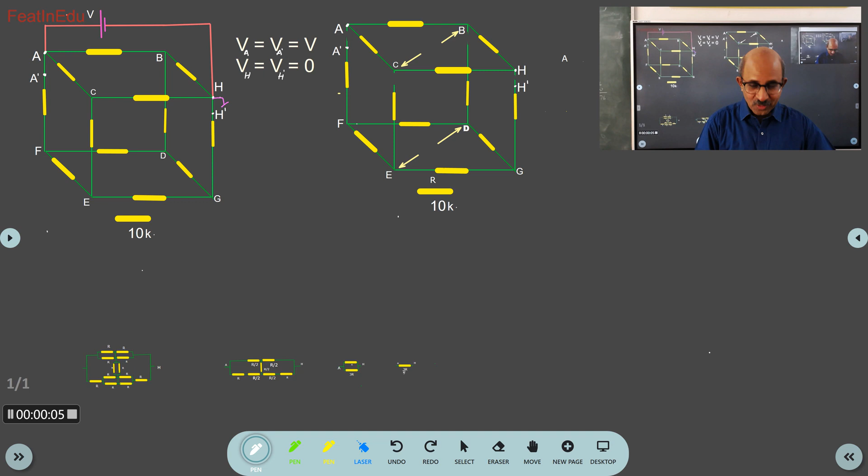This was the numerical problem that was put up in the group. As you can see here, I have the circuit that was given, the network that was given, and I have connected a battery, a constant voltage source V. This point is taken as reference, and I have created one more terminal here, A dash and H dash. I'll tell you why we have connected that, and this is how the network was looking.

As you can see, these two terminals are shorted, so I get VA equal to VA dash equal to V, and VH equal to VH dash equal to 0, because it's the reference point. Accordingly, here is what I have done.

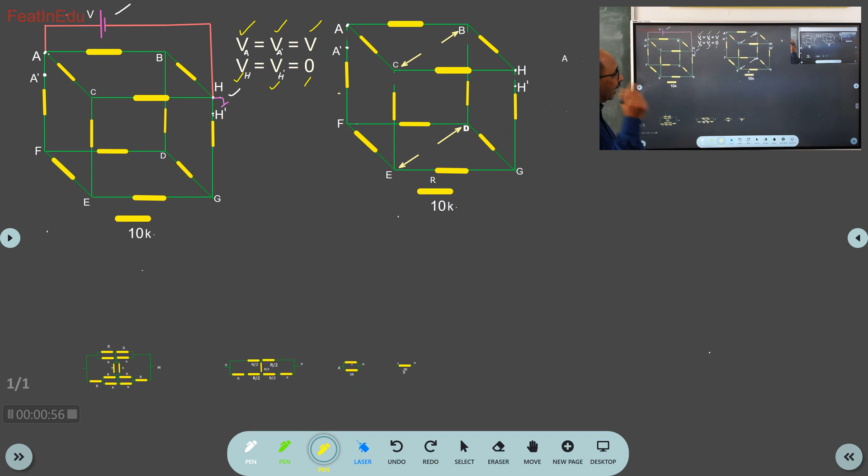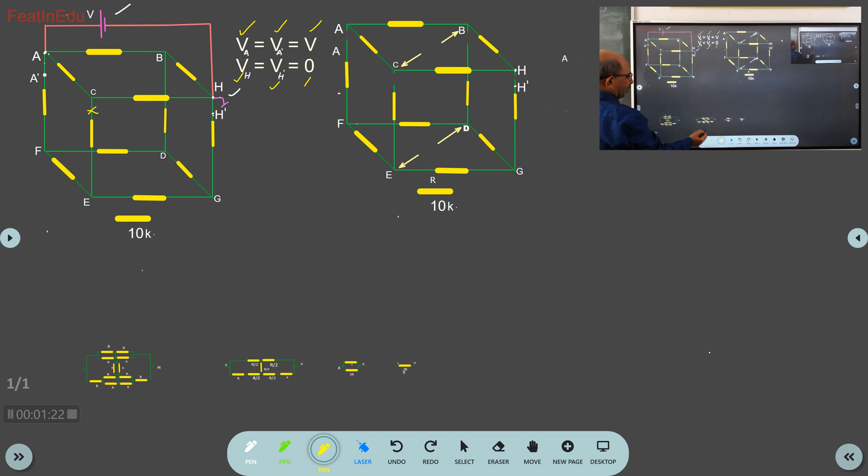This part, I have cut it off. You can see I have cut it here, the circuit I have cut. I have separated A and A dash, and H and H dash. I have also disconnected this circuit here, and disconnected here, right? And all the lower circuits I have disconnected, this to this, etc. So you can see that this circuit is equivalent to this.

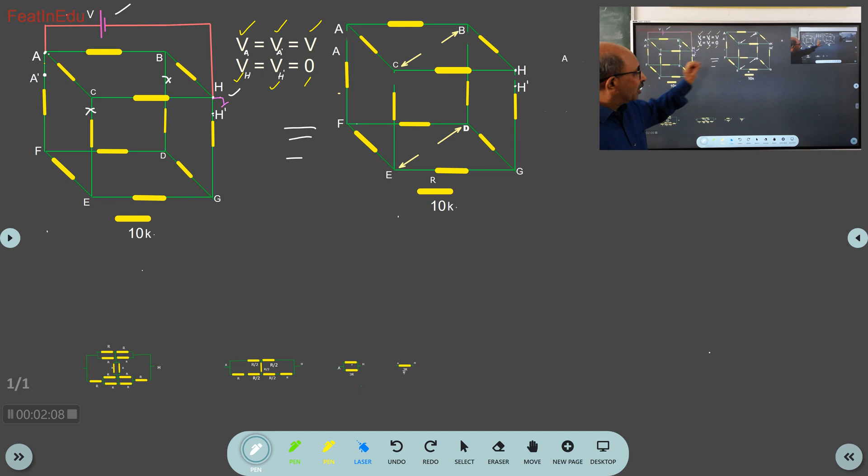That means now I have a network ABHC on the top, and the circuit below, the network below, is disconnected. That's what you see here. I can legitimately do this because we have been asked to find the resultant network, the equivalent resistance between A and H. All right, so here we go.

Now, if you look at the network ABHC, it is a Wheatstone network. Since this resistance and this resistance are equal, and these two are also equal, the potential at B and C will be the same. If you remember, we used to connect a galvanometer there between B and C, and under balanced condition, no current will flow, so we get that condition.

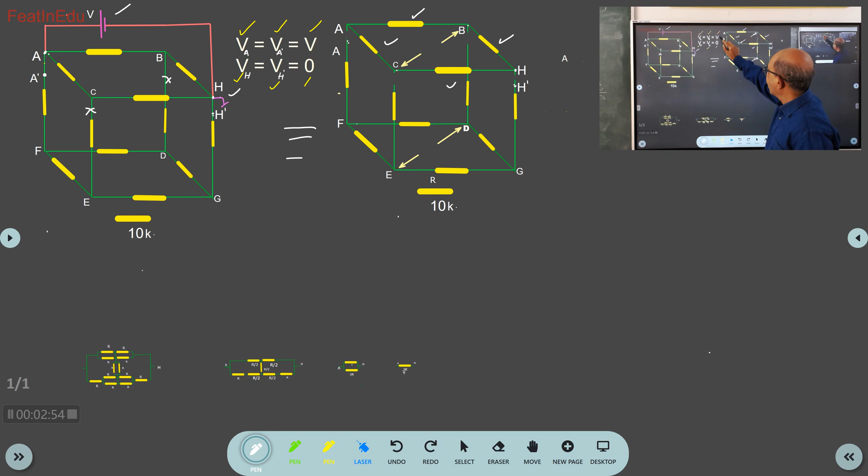Now, similarly, if you see here, to this point A dash and H dash, if we connect the same voltage source, the current will flow like this into these two networks. Again, you will find that the potential at D and potential at E will be the same, because this resistance equals this resistance equals this resistance, this equals this equals this. So D and E will also be at the same potential. I suppose this is understood.

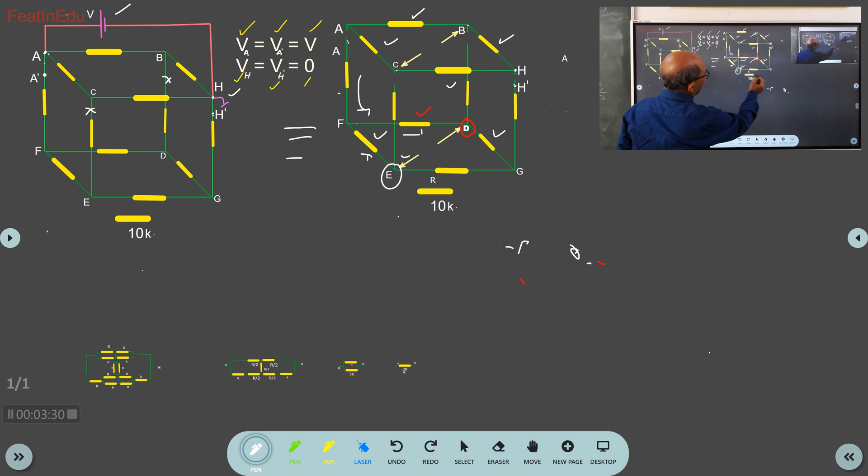Okay, fine. So from here on, you see again FDGE. This is again going to form a Wheatstone bridge with D and E at the same potential. That is, if you connect a galvanometer between D and E, again it will show null deflection. So this is how it looks.

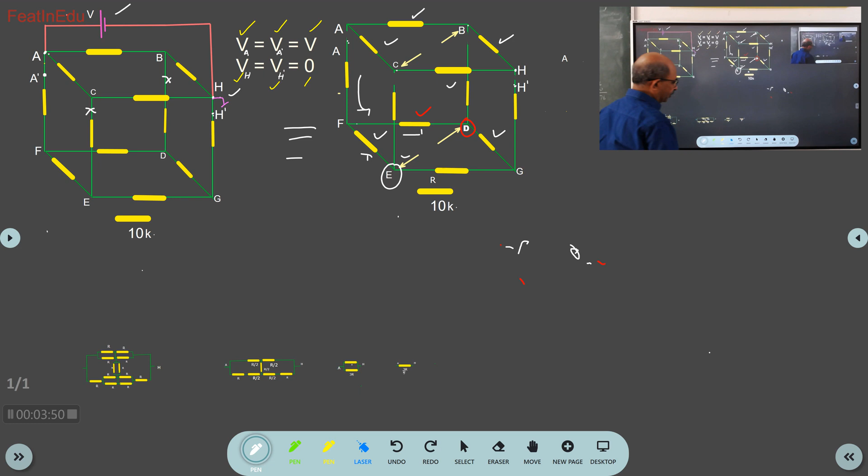And now, the equivalent of this, I will show you. As you can see here, this is the common point A, right, what we have got here. This is B, and this is C. And this point will become H, as it is. You can see here, between A and B there is R, between A and C there is R, and so on and so forth. And here you can see, as I told you, B and C are at the same potential.

It forms a Wheatstone bridge, and therefore I can connect a dummy wire here, zero resistance wire, or any resistance for that matter, because if I connect a dummy wire there, it will not alter the current or the voltage. The nodal voltage or the nodal current at B and C will not be altered, so I can jolly well make this connection.

Now, similarly, if you look at the network here, this part, if you look at it, so here also...

So if you look at this part of the network, this is basically these four resistors. And again here you see this point, this point will again be F. This point becomes D, this point becomes E, and this point of course is G. D and E will be at same potential, if you look at it as a Wheatstone bridge.

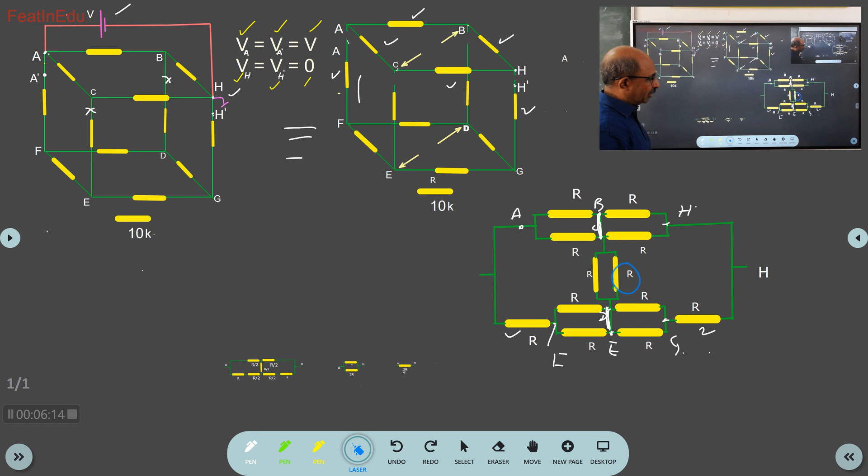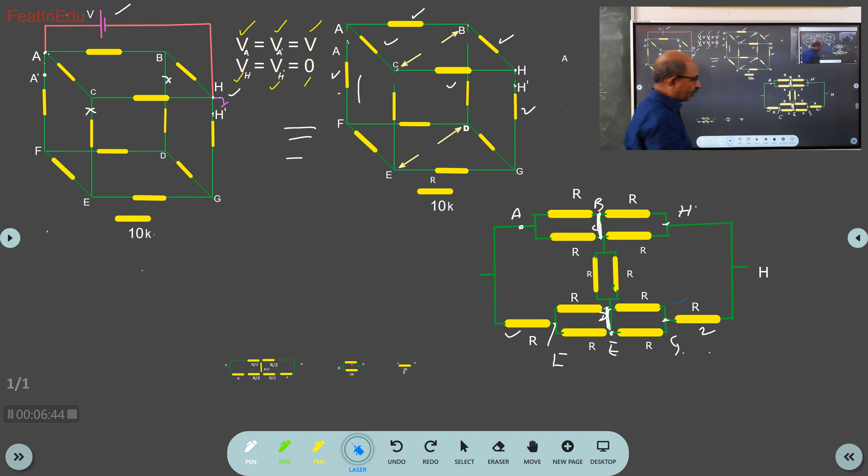Now we will reduce this network, because you see this R and R are in parallel, so this will become R by 2, and this R and R are parallel, so the combination of these two will again become R by 2, and R by 2 will come in series. Similarly here, these two parallel R by 2, R by 2 will come in series with this R and this R. That's how the reduction will take place. So that reduced network is this.

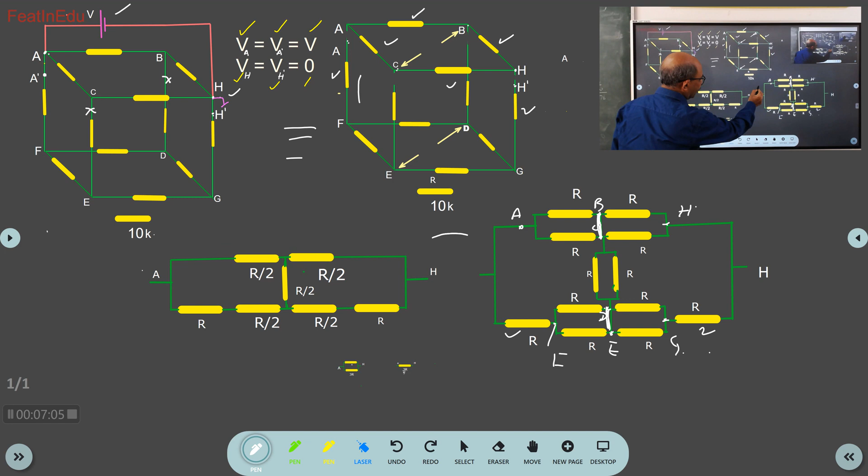That is, I have converted this network to this. So this is how it gets reduced. So this gets reduced to, here this is A and this is H, and this point, as you can see here, is BC combined, and this point is D and E combined. And these two resistors will come in parallel, R by 2.

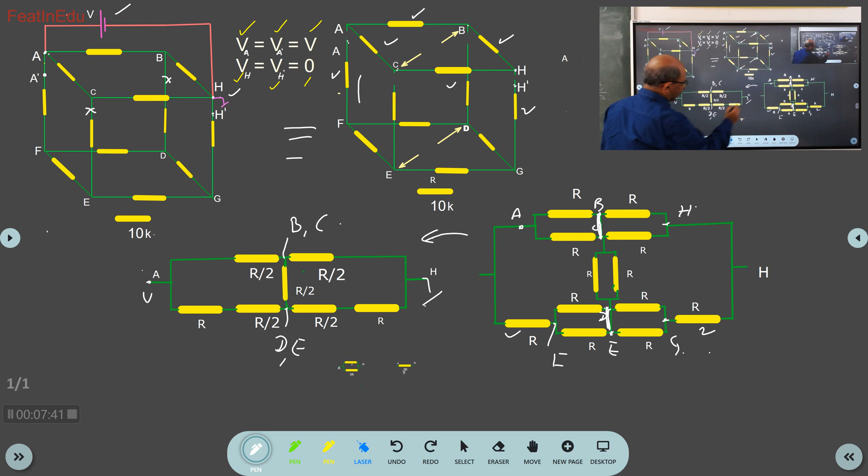Now again you see that if this potential here is V and this potential here is grounded, so this potential here will be V by 2, simple voltage divider. And here you see the combination of R and R by 2 will be 3R by 2. Combination of R and R by 2 will again be 3R by 2. And therefore this potential will also be V by 2. So these two are at same potential.

So no current will flow in this resistor, so it's a dummy resistor. You just have to knock it off. And then what happens is these two will come in series, R by 2, R by 2. So this will be R, and here R by 2, R by 2, R by 2 will come in series. So that gives rise to 3R.

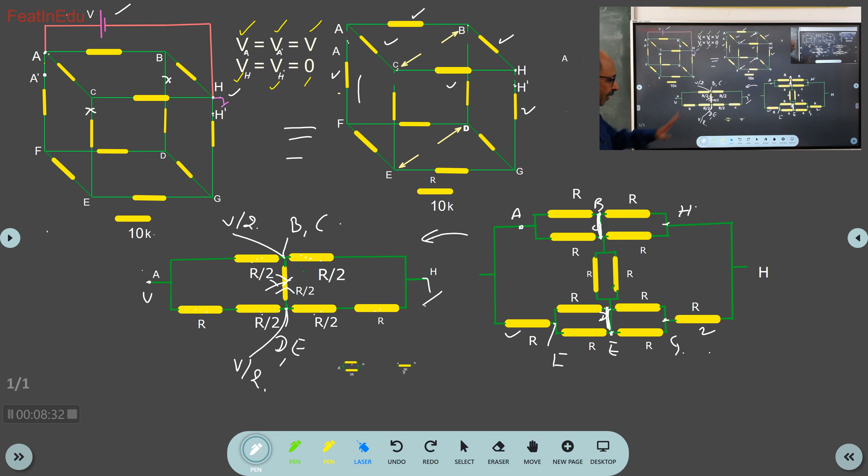So this will give rise to 3R, and this is R. So you will get that parallel combination. I suppose it is clear. Then thereafterwards, you will find the reduced version of that.

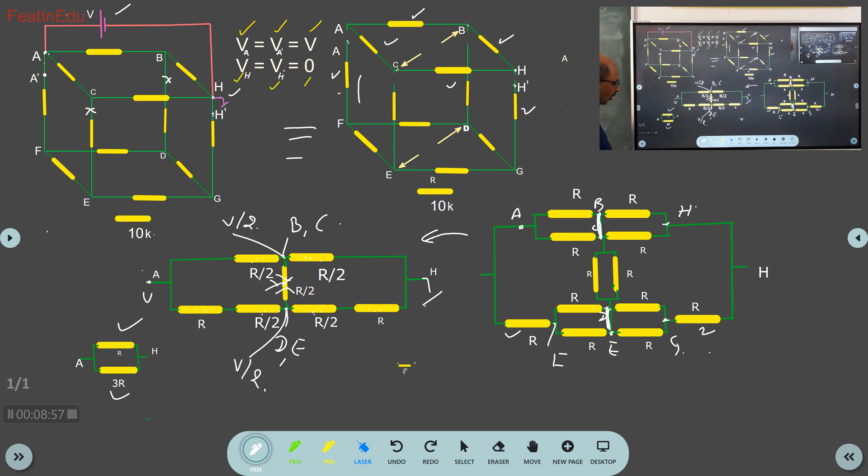So as I told you, R by 2, R by 2 will be R, and R by 2, R by 2, R by 2 will be 3R. So R will be in parallel with 3R. So R parallel 3R, again A and H in between that. So that combination will yield this final answer.

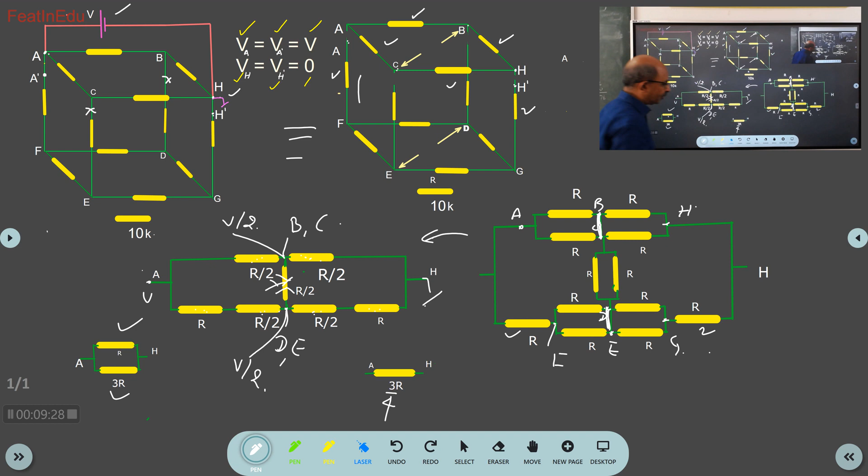So this is it. So you get here 3 by 4 R. So that's the final answer, and R is 10K, so 10K into 3 by 4 will give you 7.5. Okay, that's the simple thing.